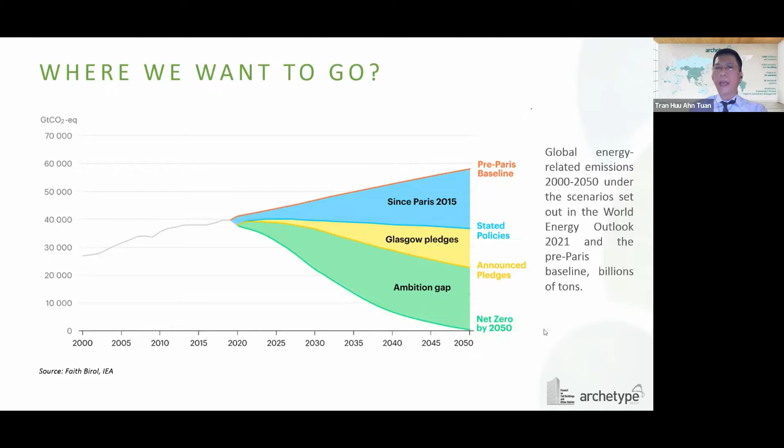So today is about high-rise buildings, and yes, buildings play a big role in this ambitious target. Nowadays, buildings generate 40% of annual carbon emission.

A large proportion of such emission is from the energy used for building operation, 28%, which we call operational energy, and 11% from what we call embodied energy, the energy used during extraction of raw material until it becomes a component in the building.

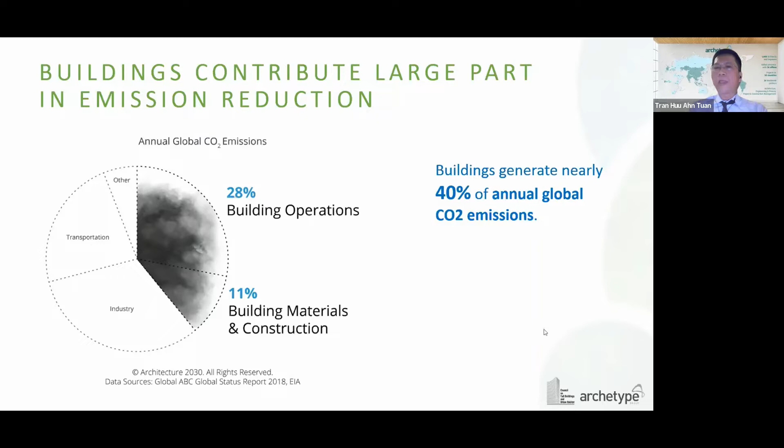Let me explain a bit about operational energy and embodied energy in buildings. During the life cycle of a building, around 90% of its energy consumption is for operational activities, and only 10% for embodied energy. Energy used for cooling and heating is a big part of the operational energy.

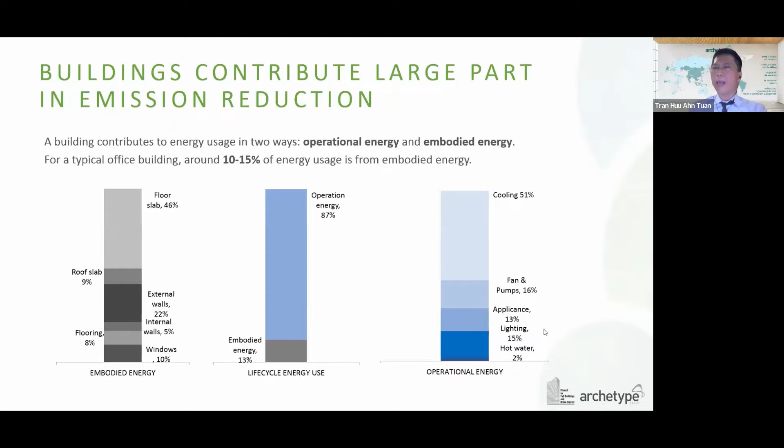For embodied energy, the floor slab and the roof are a big part. This is what we should look at when we try to optimize the design, and we should have good communication with all project stakeholders, and even educate clients on long-term targets instead of short-term goals.

Since operational energy accounts for 90% of the total energy consumption of a building's lifetime, the target of carbon emission reduction in buildings is to reduce operational carbon emission intensity.

The baseline operational carbon emission of a typical office building in some Southeast Asian countries, as you see in the chart here - Vietnam emits 8.3 kilogram of carbon emission per square meter per year.

And it is on the top, meaning Vietnam is the least energy efficient, while Singapore is only one third of that, at 2.7.

So Singapore is actually doing a good job compared to other countries within the region and even the world.

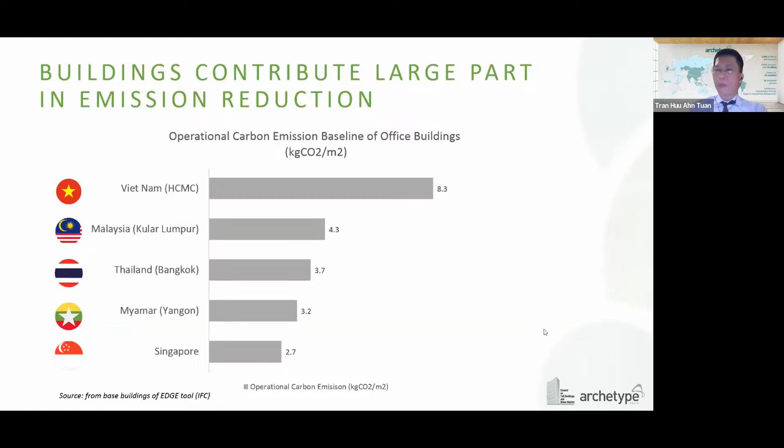Okay, so when it comes to tools that help the design team achieve carbon emission reduction, we would like to introduce the Edge Green Building Rating System, an advanced and innovative tool to help the project team in designing energy efficient buildings and achieve carbon emission reduction targets.

For people who haven't heard about Edge yet, a quick introduction: Edge establishes a baseline and helps the design team reach a target reduction of 20% in each of three categories: energy, water, and material.

Edge has 3 award levels. The first level is the certified level, for projects that meet the 20% reduction.

A higher level is Edge Advanced, for a project to achieve 40% or more on-site energy saving. And the highest level is Edge Zero Carbon, for a project to achieve Edge Advanced with 100% of renewable energy on-site or off-site, or with carbon offset, emission offset.

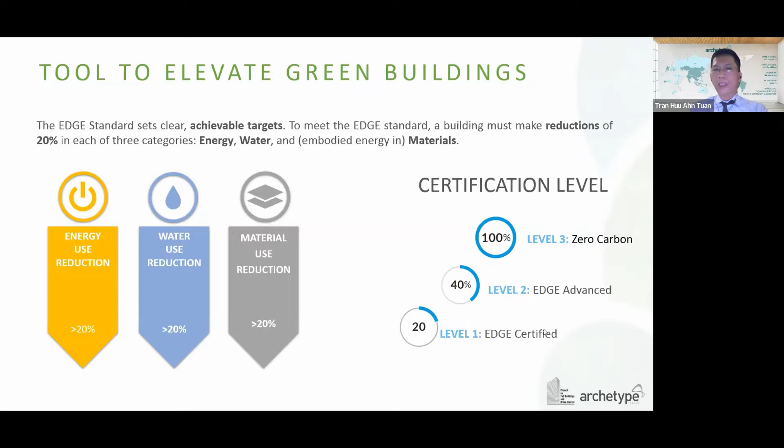To continue, I would like to introduce Ms. Eleni. She's already been introduced. She's the co-founder and commercial director of Sintali, and she will present how Edge can support zero carbon, and some case studies around the world.

Thank you very much. I think Edge has been a really valuable tool, and it's really been great to see how Edge has been implemented across the region. As Tran said, there's such an urgent need to reduce carbon emissions, and buildings play such an important role.

One of the things is finding the right tools to really reduce that, both operational and embodied carbon. But the other thing as well is to find the tool to do this at scale. So we know we have this net zero target by 2050, and we know it's highly, highly ambitious. And if we take the approach of thinking about an individual building at a time, we're never going to make it.

Because simply the math doesn't make sense. If you think about how much time and effort it takes to green just one building, and then think about every building we have on this planet, it just doesn't add up. And so Edge not only gives you a pathway for zero carbon, but it also gives you a pathway to do this and implement it at scale.

That's really what I'm going to be talking about today. So if we shift to the next slide, I'll give you a little introduction in terms of our methodology that we have developed through Sintali SGS to help companies be able to reach zero carbon at scale for their portfolio of buildings.

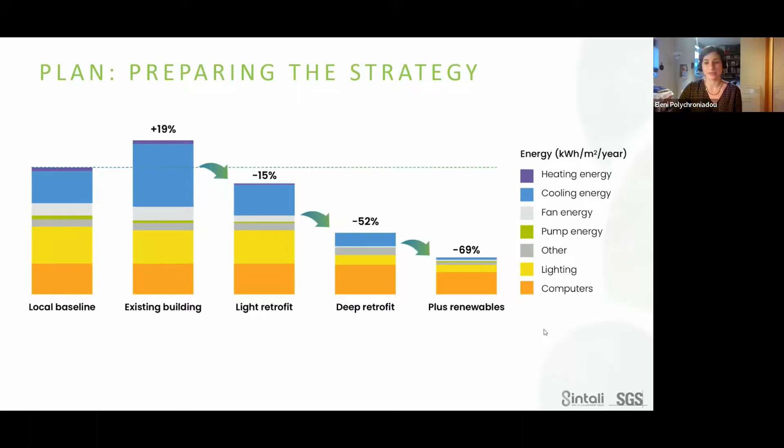Now, once you have a good sense of what you want to do, you then can take all that information to a cost consultant, get that final project outlined, really figure out what materials or what specific technology you will need to be able to implement, and again lay it out over time.

You might have the easy wins in the beginning, the ones that might have the lowest cost and the shortest time to implement, and build up to the more expensive investments to move towards zero carbon, such as ultimately investing in renewable energy, which is likely needed as we shift to zero carbon.

But this is really the implementation phase, and also really finding those efficiencies of scale. And that's another element as to why

implementing portfolio approaches makes sense, is because when you're able to do this across a portfolio of multiple buildings, you're able to realize efficiency savings, simply some things as simple as bulk discounts and being able to implement something across hundreds of buildings instead of one building at a time. So really looking at those time savings and implementing it in a way that makes sense.

So you have your plan in place, you've started implementing it. So then you start to shift your portfolio to zero carbon. And as I mentioned, if we shift onto the next slide, it doesn't happen overnight.

And particularly as we're thinking about these greater schemes, when we're thinking about a company's entire building stock or entire pipeline of buildings, it isn't going to happen overnight. But being able to validate that progress and set those targets and slowly start to see how those improvements are being made over time gets us to this end goal of having zero carbon by 2050 for new and existing buildings.

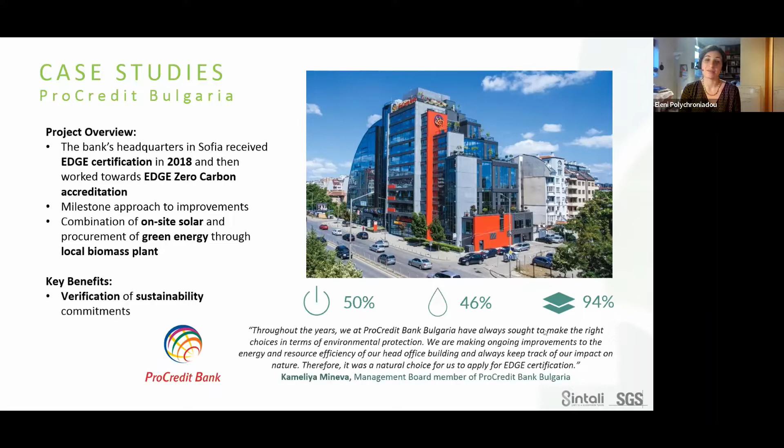But what they have been doing is using the EDGE tool to really think about the quantification of impact, to really set out again that strategy, and to really move towards how are they going to get to zero carbon. This one starts to feel a little bit more of the problem where we have a lot of older buildings.

So Lidl was dealing with some buildings of sort of 15 and 20 years, and I'm personally sitting in London, and we know we have buildings here that are 100 and 200 years old. So the challenge of actually getting these to zero carbon is massive and should not be underestimated. And so that pathway and that setting out of a plan and really thinking through the options and how to do it in a way that makes sense for the business as well as for the environment and reducing carbon is really, really important.

And so with Lidl, they were able to access international financing by doing this first stage of the approach and figuring out how to implement green buildings at scale to be able to eventually get to zero carbon. Because I think that's the key thing, is how do you continue this journey and how do you make sure that that end goal is actually happening and is not just a vague commitment, but really has a plan in place about how you're going to get there.

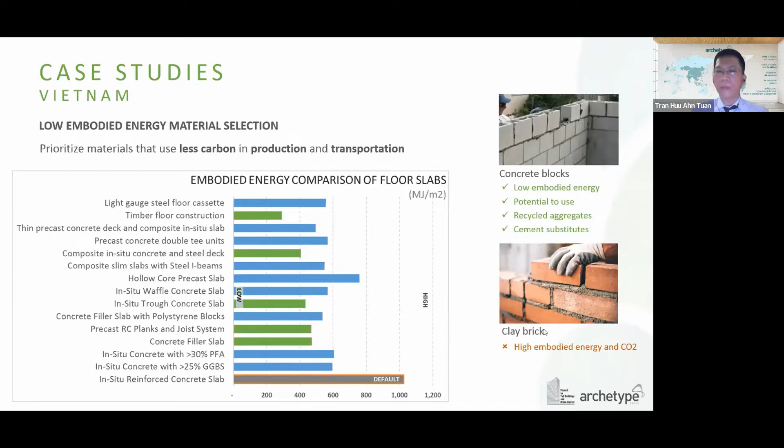And almost 50% of the embodied energy of a building is from the floor slab and the roof, especially for a high-rise building. So instead of using traditional in-situ concrete, we can have other concrete slab construction to reduce the embodied energy and the cost. For example, by adding GGBS into the concrete, we can reduce the use of cement in the concrete. So we can reduce up to 7% of embodied energy.

Or hollow slab can reduce up to 30%, and maybe is also better for noise insulation in the slab. Thinner slabs such as concrete on metal decking or post-tension slab can reduce up to 40% of embodied energy consumption.

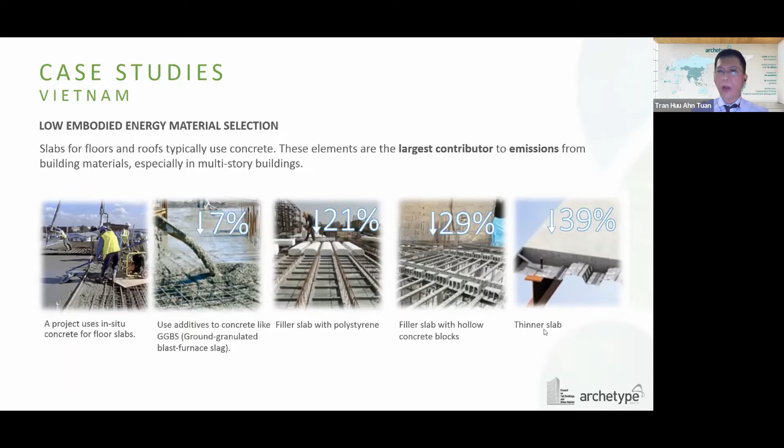For the operational energy, which is in the next slide, you can look at the strategy. So we reduced the cooling energy load with high performance windows, insulated roof, and efficient HVAC system, which is very typical for the buildings that we design for our projects.

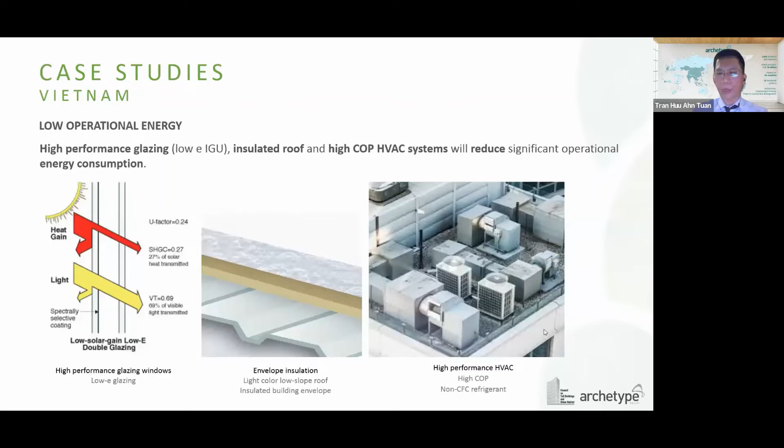And as the result, in the next slide, the total saving of the project is 3,600 megawatt per year for embodied energy, and 144 megawatt of electricity per year, which is equivalent to 81 tons of carbon emission per year, which is very significant.

So the nice thing is EDGE can show the saving instantly, which is superior to many green rating systems. It can break down into different energy uses like cooling, heating, lighting, or for material, it can break down into slab, windows, roof, and you can see significant reduction of the cooling and reduction of the embodied energy from the slab, from the app.

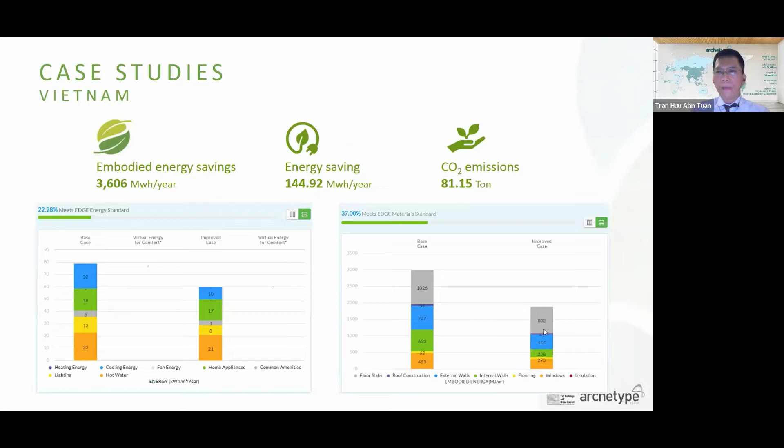The next slide, I would like to showcase another project in Cambodia. So this actually is not related to EDGE, sorry, but this project is a recently designed office building in Cambodia, the administrative building for the Cambodia National Assembly, and the project will be constructed in early 2022, next year, and to be completed by the end of 2023.

In this project, we haven't followed any green certification system, but actually we implemented many green design strategies because we want the project to be a model for sustainable institutional buildings in Cambodia.

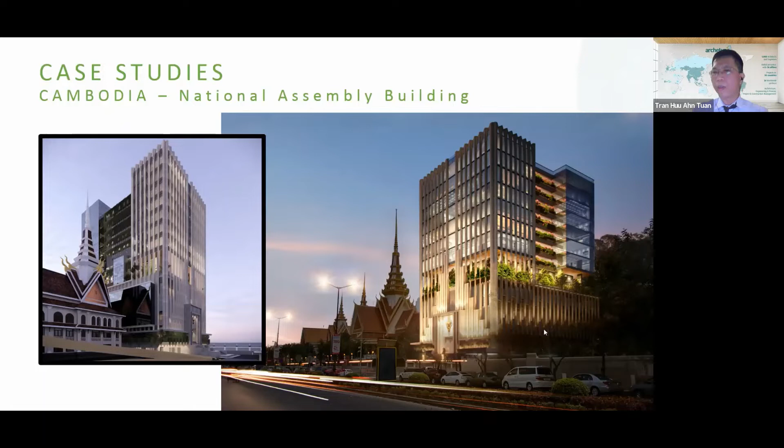So the first thing, we try to implement the natural ventilation strategy for the building, and you can see this is not a very high-rise building. It's about 18 stories high. If feasible, natural ventilation is a good solution to reduce a lot of energy used for air conditioners. You know that cooling is the largest part of the energy consumption.

So actually, it's quite difficult to achieve the thermal comfort requirement in such a very hot and humid climate, like in Cambodia, in Vietnam, and Southeast Asia. So we proposed the natural ventilation strategy for the central hall of the 12th floor. The central hall acts as the thermal transitional space. So people from the outside of the building will have a little time to adjust their thermal sensation, and they will feel more comfortable

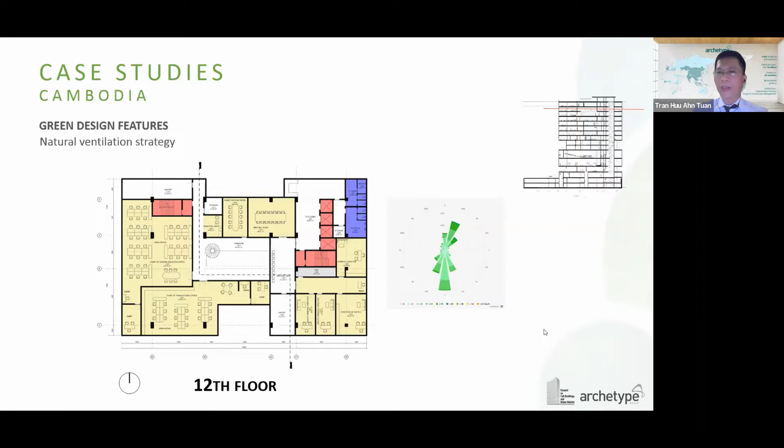before they get into the air-conditioned rooms. So to do so, we utilize the local prevailing wind direction, which is from the north-south direction. You can see the wind rose here. And we take that advantage to create an airflow path, thanks to the pressure differential between the openings.

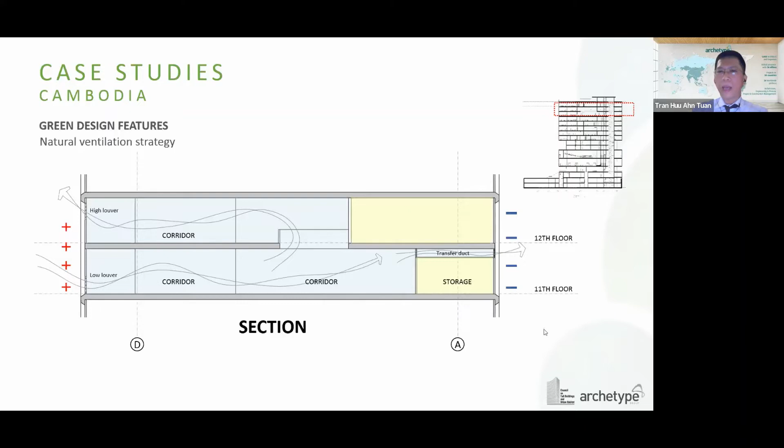In more detail for this slide, you can see the actual implementation of the combination of the stack and cross ventilation. And we also add the transfer duct above the office ceiling. And you can see the small one on the bottom right. It is used to provide the outlet for the wind flow and to avoid the noise crossover between the hall and the office space.

And the other thing for the energy saving is the design strategy to optimize for daylighting and also reduce the energy used for lighting, which is the second largest part of the energy used for any office building. So using modeling, we can identify the amount of solar radiation incident on the glazed surface, and we propose the solar adaptive shading control device so that we can maximize the natural lighting, and also we can block the sunlight and prevent glare.

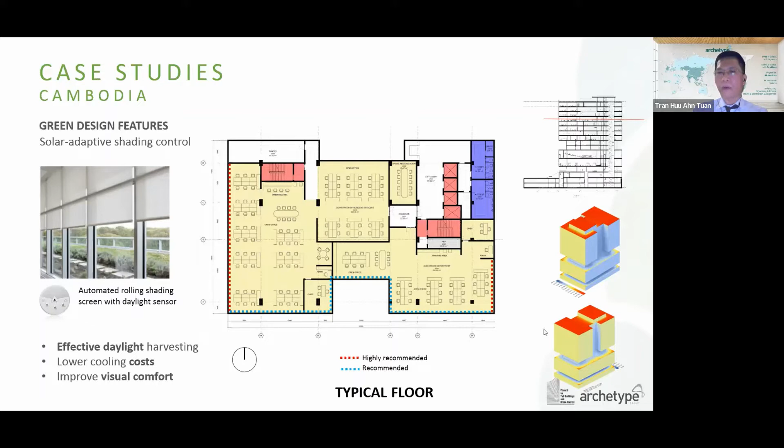Yeah, and you can see in this typical plan, we can identify the location for different types of shading device, so we can save cost for the project as well. The last thing, which is not related to energy efficiency, but visual comfort. For this case, we deal with the glare problem because this is an office building.

So what we did is we used computer modeling to calculate the daylight glare probability based on the different types of glazing. In this slide, you can see we did the modeling for two different spaces, an office room and a meeting room, for 3 different times of the day, and for 3 different types of glazing.

We use different values for VLT, meaning visible light transmittance, and you can see a DGP less than 0.35 is recommended, and a DGP of more than 0.45 is intolerable glare, or unacceptable. And with the modeling, we can identify the right glazing type for the building.

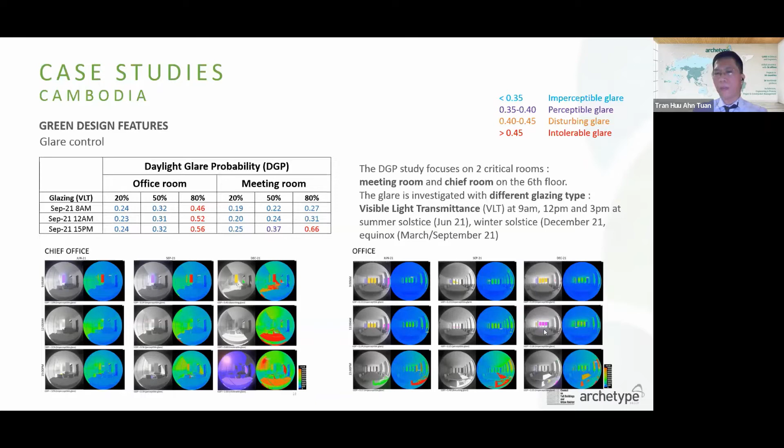So based on such modeling, we can come up with the glazing construction type that can take the energy saving into account and also tackle the glare issues. The glazing is a high-performing IGU type with the low-E coating on the second surface of the first glazing pane for solar control. You can see we have more green design features from the project.

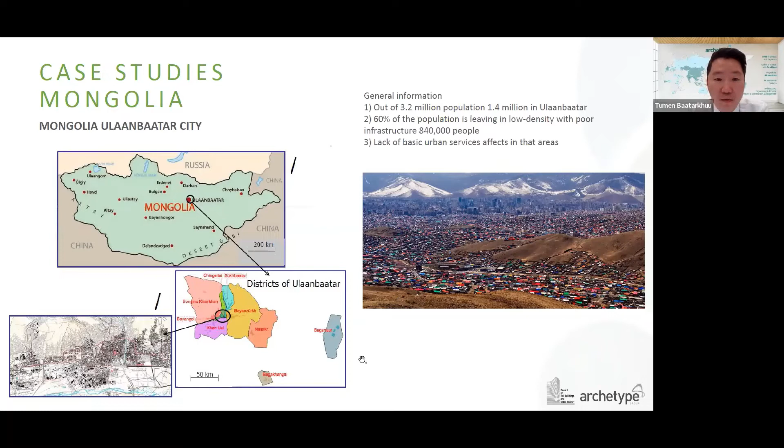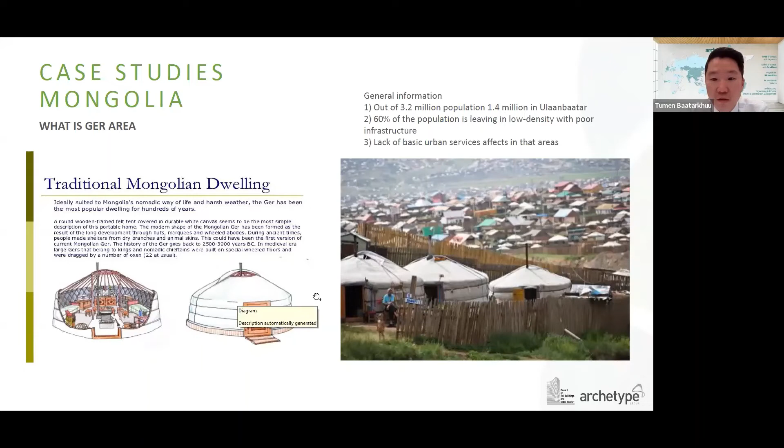So what is a ger area? Ger is a traditional yurt that we have been using for 1,000 years in Mongolia. And I know I'm going to be a little bit historical, but the USSR failed, and Mongolia in 1991 moved to democracy. People freely moved to whatever place they wanted to live. So without any management, people moved to Ulaanbaatar city to improve their life and settled down wherever they wanted. Eventually, this led to a very unmanaged district full of residential areas without any basic infrastructure.

Secondly, we have poor sanitation from almost exclusive reliance on the open pit, which is a toilet that only uses a dug pit without any basic management. Then we have third, poor solid waste collection. This again comes down to mismanagement. Fourth, limited access to potable water. We call them water kiosks. So within a certain area, we have a couple of kiosks for the people to get water.

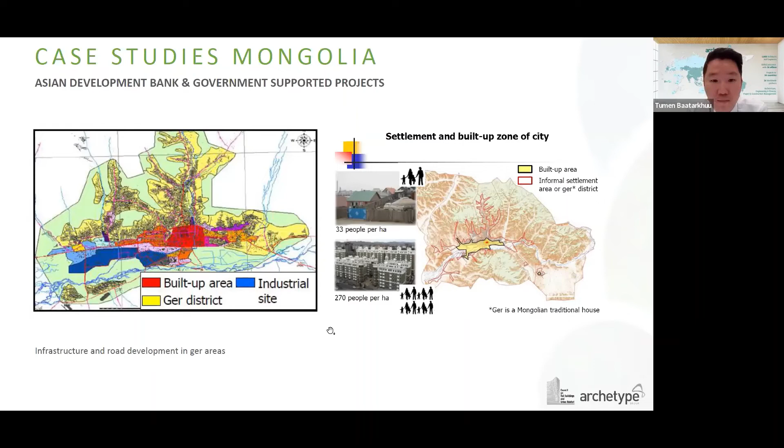They are about to swap for the apartments that we have planned. So we got 4 blocks we call A and B, and A and B. A is similar with the other A, and B is similar, which is connected with that. In total, the land area is 2,900 square meters, with 20 apartments, which means the 4 landowner households are going to be moving in, and the rest, 16 apartments, could be sold and eventually benefit the construction companies doing it.

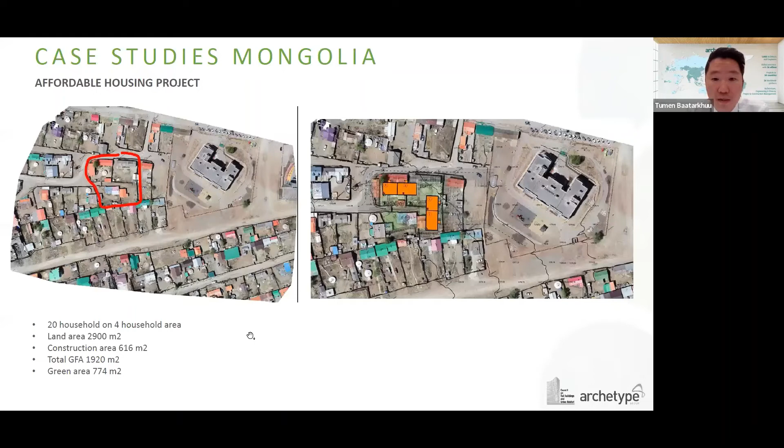Total GFA of the blocks is 1,920 square meters, with the green area 774 square meters. So one of the basic ideas of affordable housing is we're going back to the history, during the socialist times, when affordable housing was done and regulated by the government. It's easy to build, especially precast concrete, especially for countries where during the winter time the construction stops.

The benefit of precast concrete is, because it is manufactured inside, the quality can be controlled and it's very easy to assemble. It can be assembled during the winter. Also, it can be mass produced. So the idea of this project is going back to the original idea, because this is affordable housing. This should be for everyone to live.

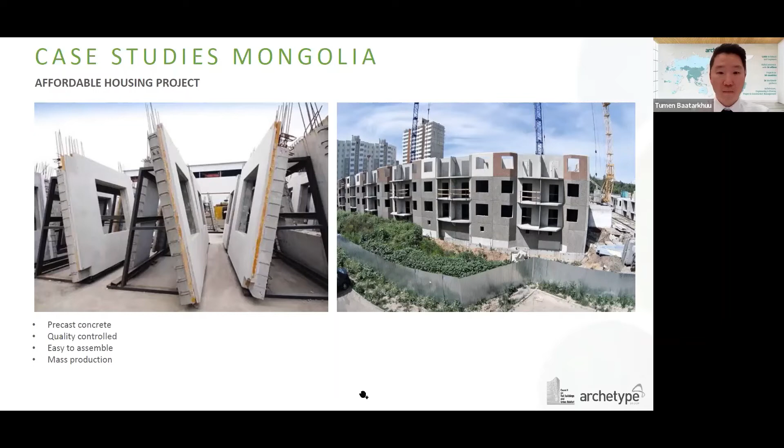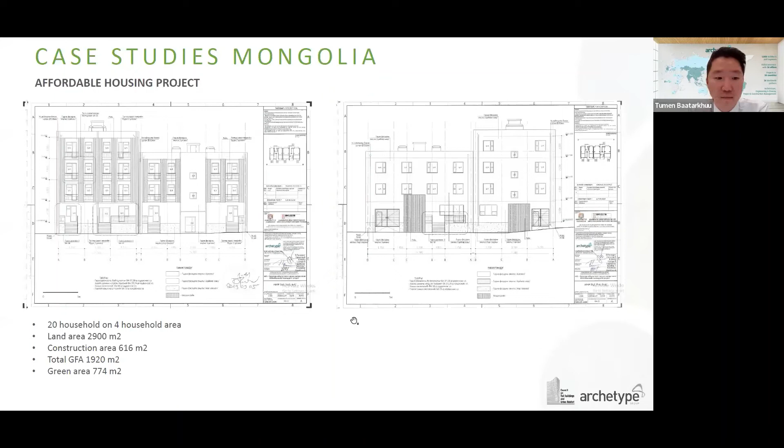This project was due to end this year. Construction has already started. However, due to the COVID pandemic, we have problems with materials, transportation, workforce. So the construction is still ongoing. It should be able to finish in the first season of 2022.

In conclusion, I hope the results will show in the future that this can be set as an example to future investors to help out ger areas to improve the quality of life.

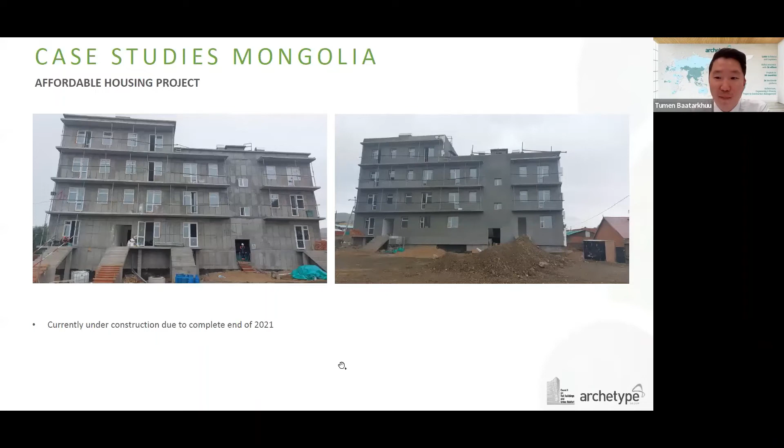Mark, microphone. It's funny, I pressed once already.

Anyway, thank you very much, Tumen. Let's hope that this type of initiative will help Ulaanbaatar reduce the production of pollution, which is present every winter, especially in Ulaanbaatar. Tough times, huh?

Okay, so now from my side, I'm glad today to share with you a presentation on a topic which is mass timber, in the conservation of carbon footprint and its reduction.

First of all, I would like to put into context what we call mass timber. Mass timber, or massive timber, is a set of structural building materials assembled from smaller wood sections into large, multi-layered panels, beams and columns, which are used to build multi-story buildings, either for commercial, housing, or institutional use.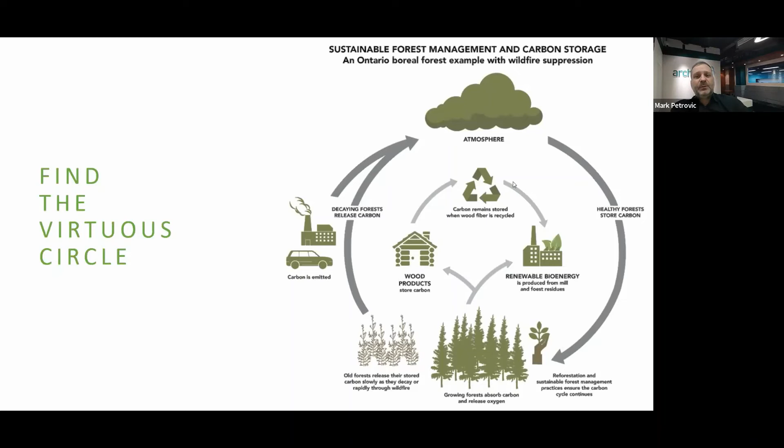So how do we find a virtuous circle with this forest topic? For example, this sketch here shows an example in Canada of the benefit of sustainable forest management. So, as Eleni talked about tools with an edge, we should talk about tools for the future. We're not just talking about planting for planting's sake, but more about planting better, I would say.

Indeed, economical, sensible wood production is not only based on square cubic meters. Price, cost, interest rates, and forest owners' objectives must be noticed. There are different ways to deal with this. So shall we be promoting forest growth usage through better selection, better choice of wood species, for which purpose, for which target?

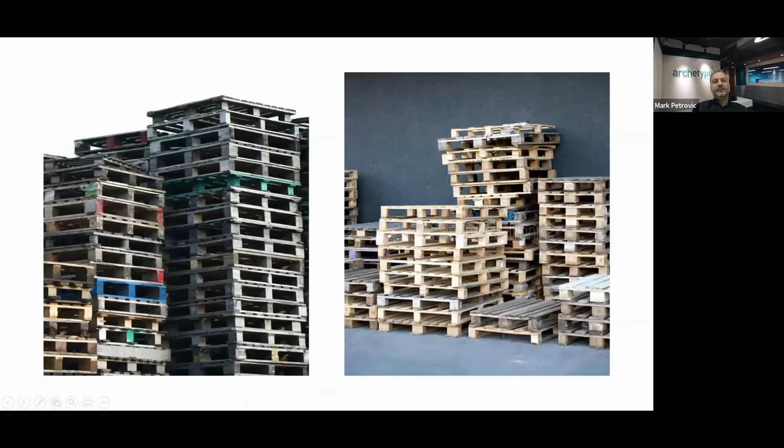One example: should we be focusing on fir trees, which take 15 years to grow and are used mostly for wooden pallets? Or should we focus on wood burl in North America, which is very popular and sought after for furniture supply and other decorative elements? Or teak trees, which take 70 years to develop—but to develop these trees you need to first create a primary forest, then a secondary one, in order to generate a climate and environment sustainable for the growth of these teak trees.

So there were some tries done in the past, for example in South America, where wood essence was planted originally from a teak essence. But unfortunately, this was abandoned because those trees never really reached the mechanical properties that were needed. So they could not answer to the demand, and at the end it was abandoned and all these forests were cut and never grown again. So there should probably be some research financed on how to find the right essence for the right purpose, to create a virtuous circle.

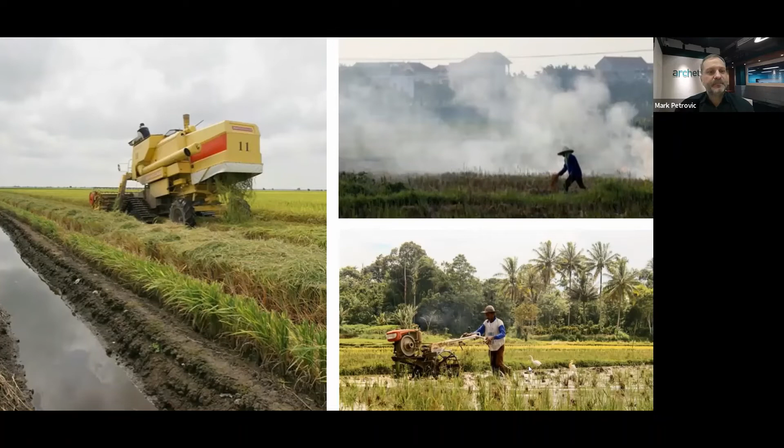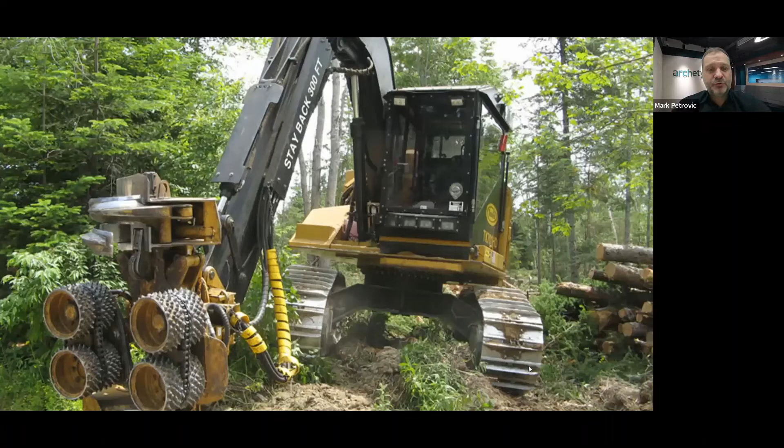We are facing today, unfortunately, a problem of using tools from the past. And I'm not talking only about modern machines, which in mass production, such as this equipment, can use up to 15 liters of diesel for just a few minutes of use, compared to more ancestral methods that are sometimes more sustainable in difficult terrain and more appropriate for the local population. Therefore, I wanted to quickly introduce a modern tool that doesn't seem obviously linked to forest growth and mass timber.

We are facing today problems of heavy systems dragging forest development. There exist, nevertheless, some new financial tools that would help eliminate so many intermediates and so much bureaucracy, which today indirectly increase carbon footprint. When you have a big organization, with all the checking bodies and people on the terrain, COVID showed that this management could actually be done remotely. In the past, or even still today, those organizations need offices, need to bring people into each country, which creates issues like transportation, flights, cars, bringing goods and families, etc. But this unfortunately also creates a huge carbon footprint on this type of management.

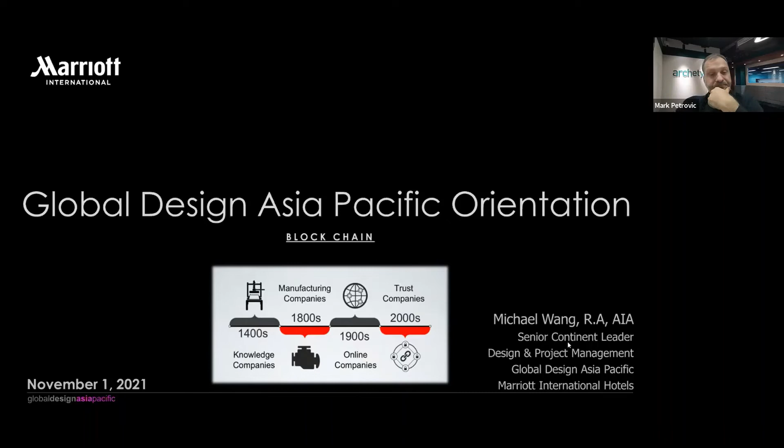Indeed, they are exploring different options on how to use these tools, in design, project management, property development, helping procurement, verification on site, sharing information, or directly paying the suppliers. This is a trendy tool that would definitely allow growth of promotion and interest in the area of forest growth.

So how do we change this vicious circle of forest dissipation into a virtuous circle? How can we designers influence it? How can we push for an increase or for a better use of timber in construction or in our design?

So we can, for example, as today, communicate on the value and advantage of using timber. What was once sounding like a green construction dream is now an increasing trend, and we start to see timber buildings growing and rising not only across North America, but Europe and Australia.

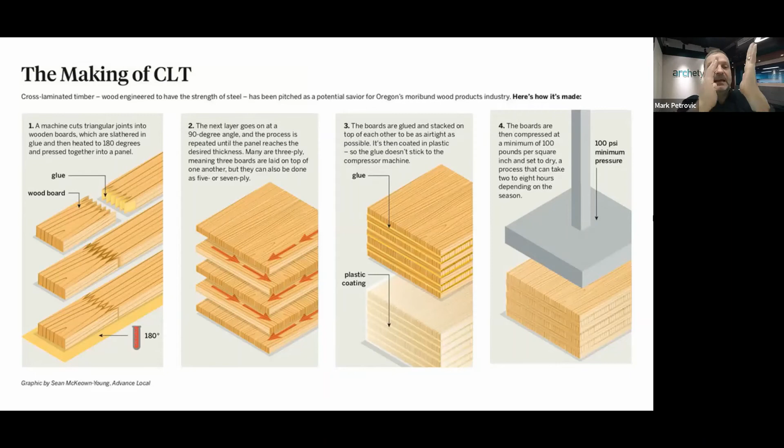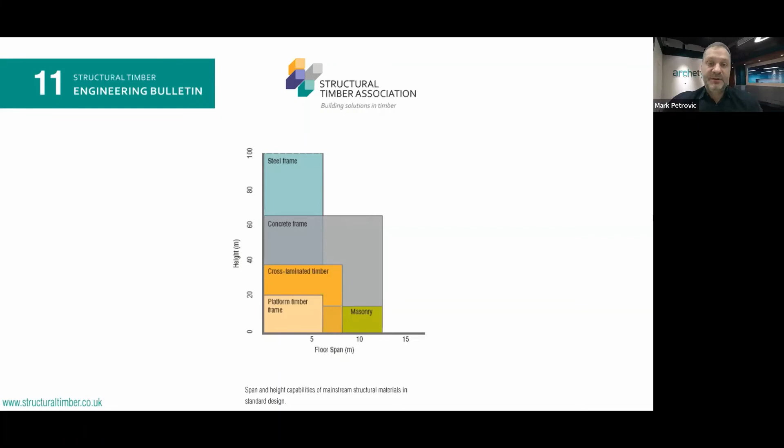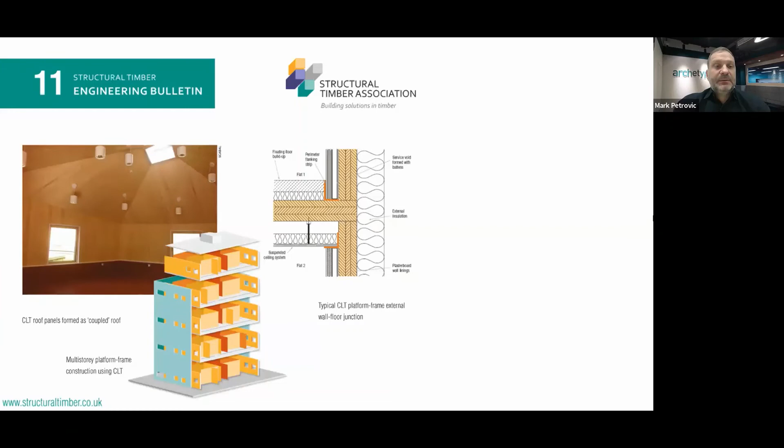Also, CLT can offer good thermal insulation performance and good sound insulation properties, which nowadays are a must in, for example, hospitality, but also residential in general. CLT can actually be used to contribute toward the overall U-value of any building. This is due to its relatively low thermal conductivity.

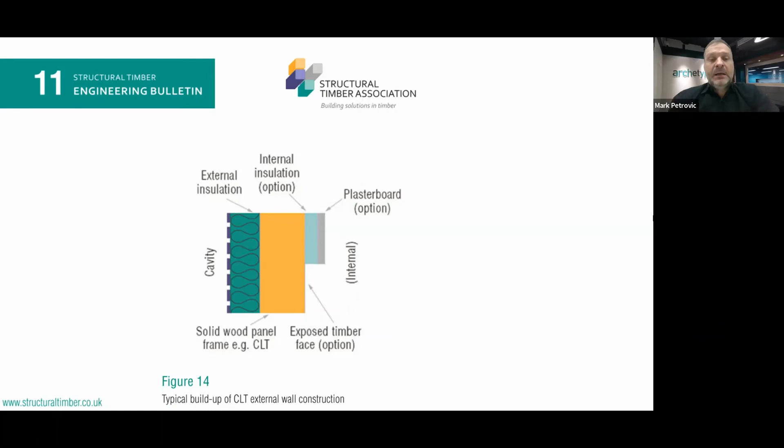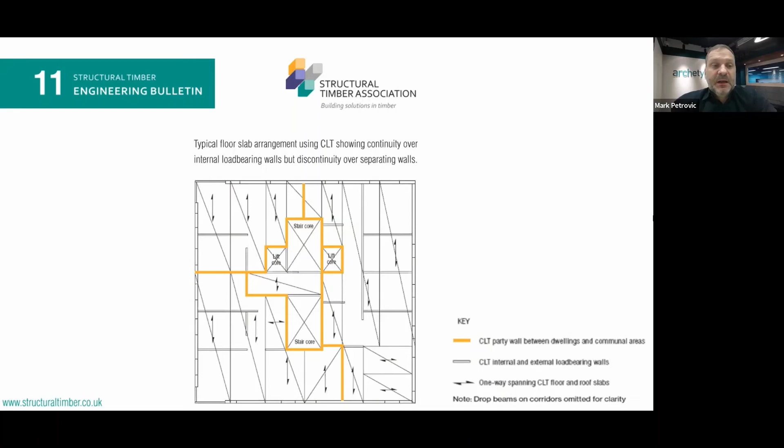So the key to the success is especially in its modular, prefabricated structures and the important flexibility of use. Here is another, but non-exhaustive, list showing different uses of CLT.

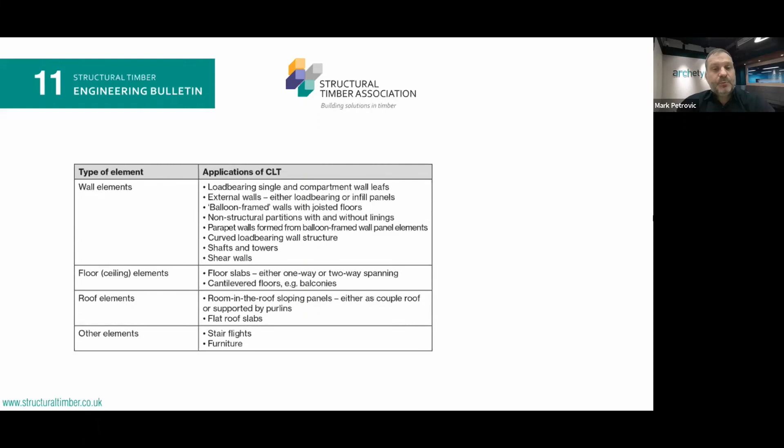So you have wall elements, floor, ceiling, roof, and others such as stairs or even furniture, obviously. But so far, CLT has been used mainly for low-rise, I would say, commercial mixed-use buildings. But recently, as the technology and its know-how are improving, architects and developers are beginning to propose buildings made in CLT with an increasing number of floors.

So even though high-rise buildings are still controversial as a use with CLT, knowing that the first problem is fire regulation in many countries, this is now a trend that is changing. And the second problem being, of course, also the structural scheme, which sometimes poses problems as those wall panels and slabs are usually arranged in a house of cards-like configuration. But again, there are more and more solutions today which are bringing options, enabling creativity and raising the number of floors.

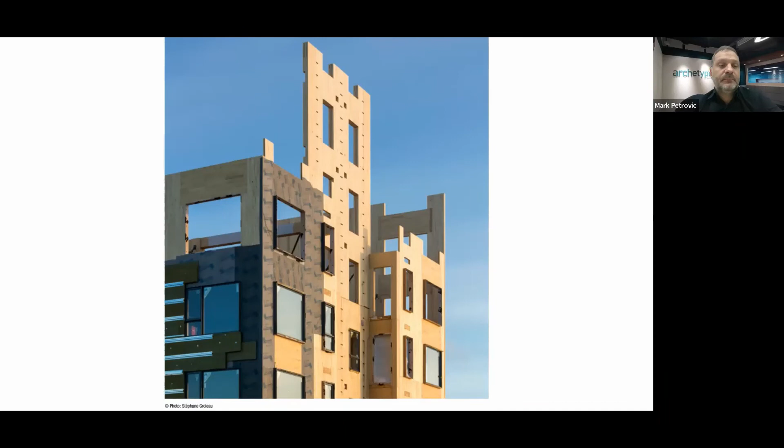So in this illustration, we can see that structural elements here were composed of 7 main shear walls made of CLT. So you have the 3 walls in the lobby in blue. I cannot show my mouse here. Well, so you have also the back wall in the emergency staircase and elevator shaft.

Yeah, thank you. Oops, no. Sorry about that. I mean, if we do it together. The mouse is not working here. Okay, no, neither. No, I cannot see. Never mind.

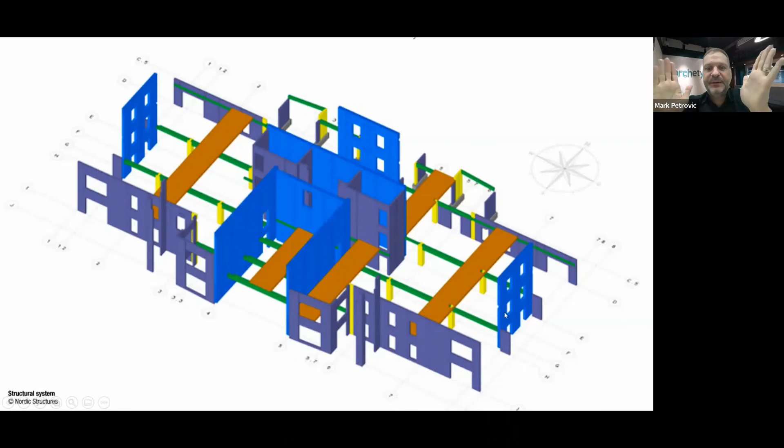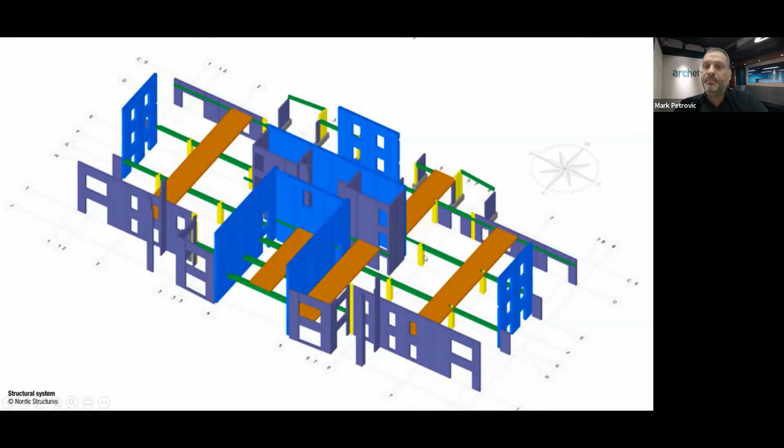So there was also the back wall in the emergency exit staircase and elevator shafts. You can also see the central portion of the north wall, and the central portions in the east and west walls. The floors, shown partially in brown, acted like a diaphragm to transfer lateral loads toward the shear walls. And the gravity load resisting system was made of CLT load-bearing walls, which you can see in purple there. And finally, 2 glulam post and beam axes, in yellow and green, were completing the main structure of this building.

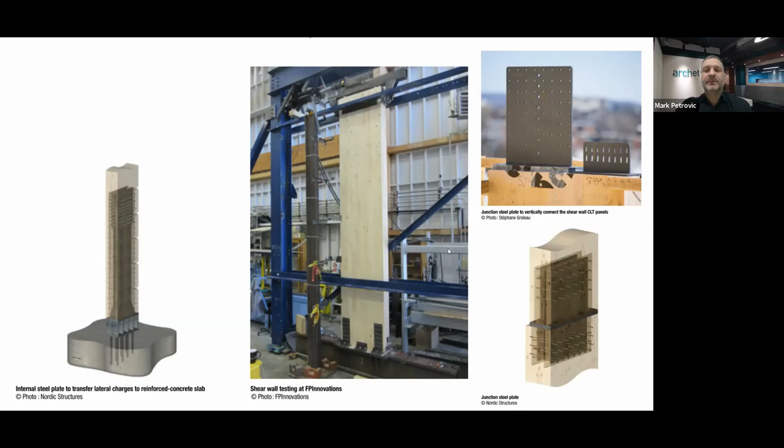Finally, in terms of foundation, we can see that the timber shear walls were connected with steel plates to the foundation. And this was a picture taken during the testing time of the design. Then firefighting was drastically examined as well. So if proper fireproofing materials and sprinklers are incorporated early into the design, in the event of fire, the design minimizes dangers and allows the inhabitants to escape, obviously, and the fire to be brought under control.

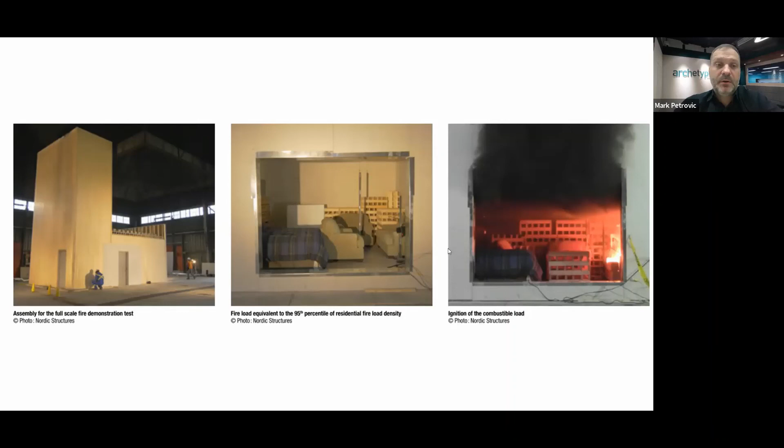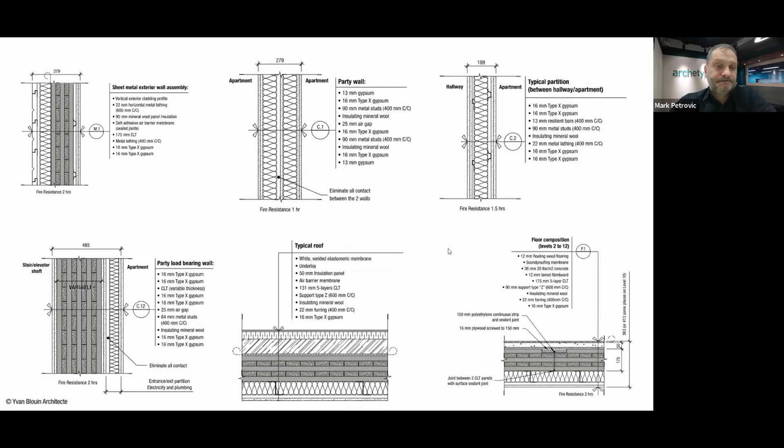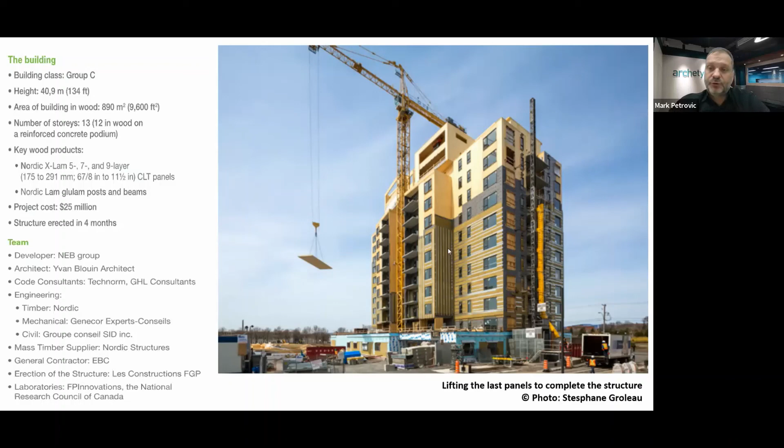four months. So let's build more, better, wisely, I would say greener, with mass timber, and mass timber can support this mission. Tall wooden buildings store carbon, preventing it from entering the atmosphere. So in contrast, buildings made of steel, unfortunately, generate large amounts of carbon emissions per ton of material produced so far.

So latest news showing that the crown of the tallest wood building will be hard to keep, as we heard that there was already a proposal in Japan, in Tokyo, with a 350-meter tall, 70-story building under design for the title of the tallest timber building. But I will let our friends and colleagues from the CTBUH follow up closely on this project and give us more updates. So thank you very much for your time today.